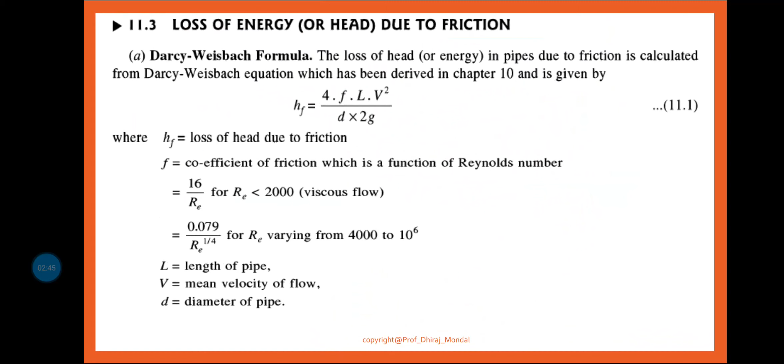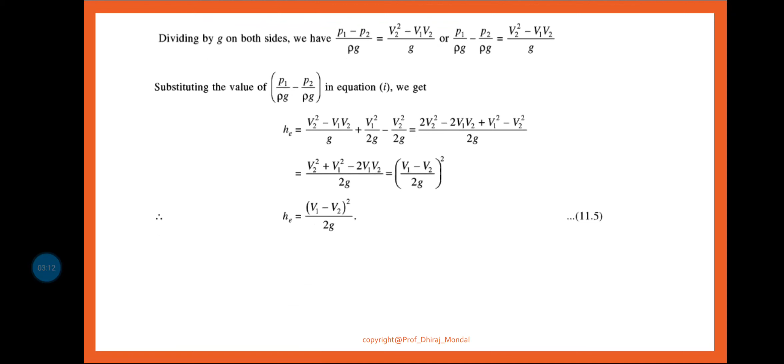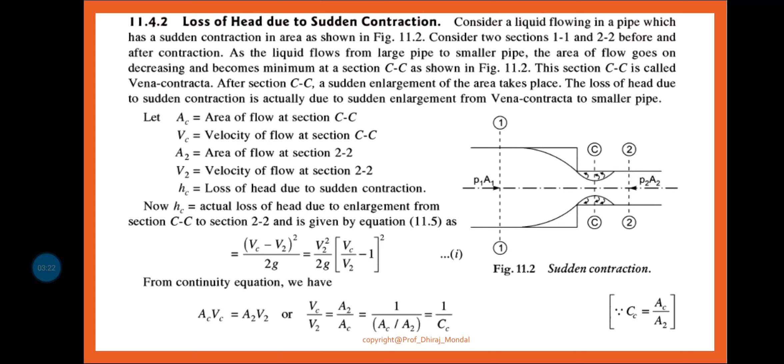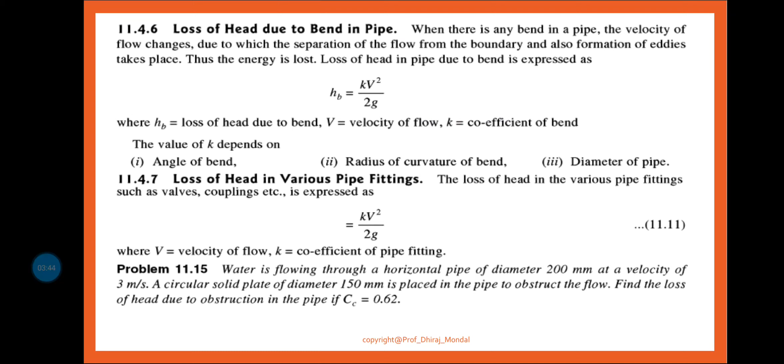So dear students, we were discussing flow through pipe, where we have seen major loss, the Darcy-Weisbach principle, then Chezy's formula, and some numericals were discussed. After that, you have seen the minor energy losses: loss due to sudden enlargement, where we derived H equals V1 minus V2 whole square by 2G, and loss of head due to sudden contraction. This was taken in the previous lecture along with some numericals. There are also other losses: loss due to entrance of the pipe, loss due to exit of the pipe, loss due to obstruction, loss of head due to bend in pipe, loss of head in various pipe fittings, and related numericals were already explained.

Now today we will discuss the hydraulic gradient line and total energy line. So basically, what do you mean by hydraulic gradient line and total energy line? The concept of hydraulic gradient line and total energy line is very useful in the study of flow of fluid through pipe. The hydraulic gradient line is defined as the sum of pressure head and datum head, P by rho g plus Z. This is called the hydraulic gradient line. Why it is needed, we will see afterward.

It is defined as the line which gives the sum of the pressure head and datum head of a flowing fluid in the pipe with respect to some reference line. Or it is the line obtained by joining the top of all vertical ordinates showing the pressure head of a flowing fluid in a pipe from the center. It is briefly written as HGL.

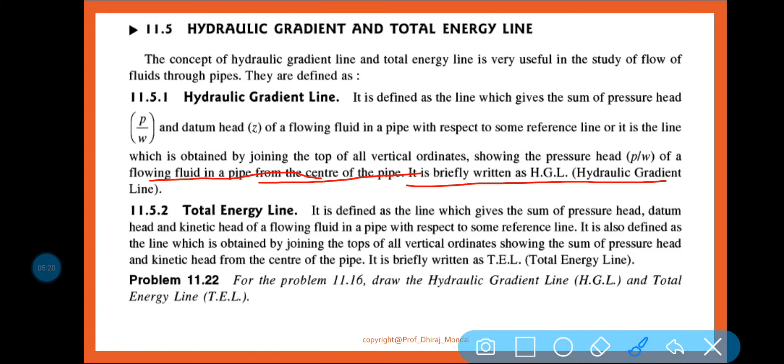Let us consider this is a reservoir. Now when the water is flowing from here to here, A to F, there is some potential head, potential energy. Due to entrance there must be some losses, and due to this traveling distance there must be some losses - major losses and minor losses. Major loss by the Darcy-Weisbach principle: you can find the major loss as 4 f L V square by 2 g D.

But what is the total energy line? It is defined as the line which gives the sum of the pressure head, datum head and kinetic head of the flowing fluid in a pipe with respect to some reference plane. So let us consider this is the reference plane.

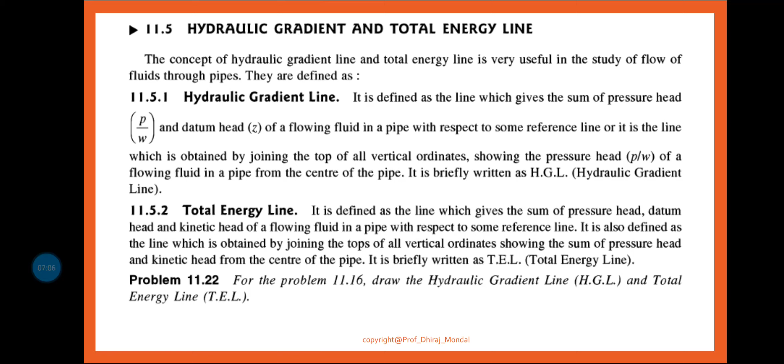It is also defined as the line obtained by joining the tops of all vertical ordinates showing the sum of pressure head and kinetic head from the center of the pipe, and it is briefly written as TEL. Now the question is problem number, this you can see.

So basically we have seen that hydraulic gradient line is equal to pressure head plus datum head. Total energy line is equal to pressure head plus datum head plus kinetic head. So ultimately total energy line is equal to velocity head plus hydraulic gradient line.

Now with the help of this example we will understand how we can draw a hydraulic gradient line and total energy line. It is written for problem 11.16, that means 11.16 number problem was there. This, the hydraulic gradient line and total energy line, you have to solve.

Now in the 11.16 number problem you will see that L, length of the pipe, is given as 50 meter, diameter is given 200 millimeter, so that is your 0.2 meter. Head, this head is given, you can see up to this mark, this head is given 4 meter. F is equal to 0.009.

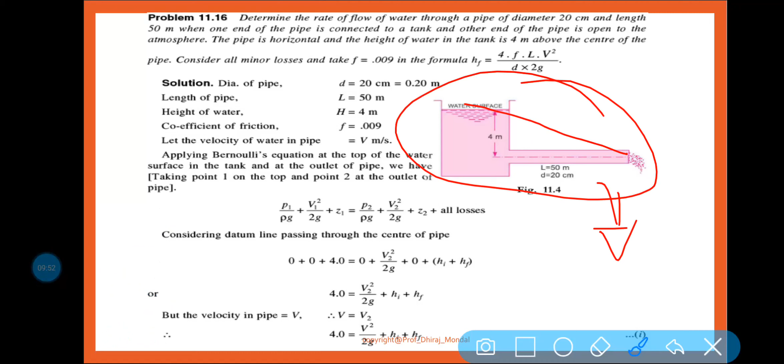So you can see the velocity, this is your velocity, this is the velocity 2.734 meter per second. Can you remember this problem? It was discussed last class, na? So this is the velocity.

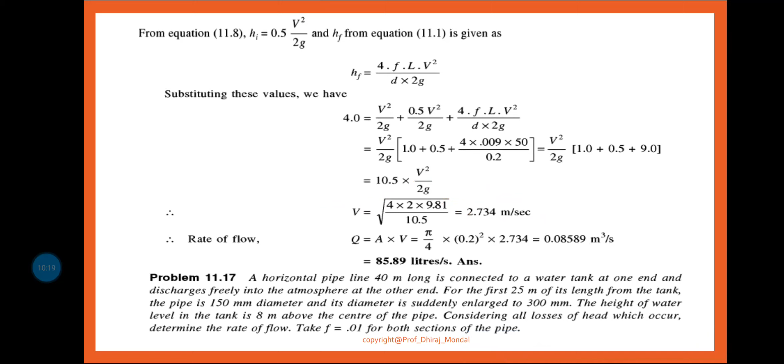Now based on this velocity we need to find out. So hi, what is hi? Hi is equal to, last class we have told you, 0.5 v square by 2g. Now you know the v, so this is the 0.19, the head loss due to entrance.

So basically when the fluid is entering into this pipe, there must be some loss of head due to entrance of the pipe. So initially the energy is your 4 meter energy head, because this is the potential head. Now from the potential head some 0.19 meter energy is lost due to entrance. So that is why it is written here, you can see.

So the point, line AD is basically declined like this, and this is the point E. This is A, this is E. Now due to this length there must be some frictional head loss. So that is your frictional head loss. So let us consider this is the frictional head loss.

Now you need to draw the total energy and hydraulic gradient line. So in the diagram you can see CG is the hydraulic gradient line and DEF is the total energy line. How it is coming? I am coming afterward.

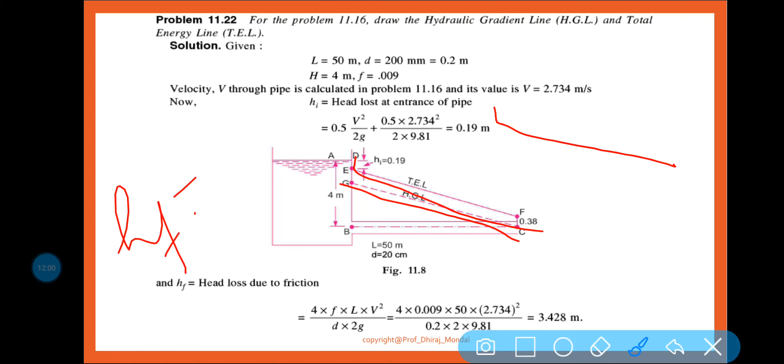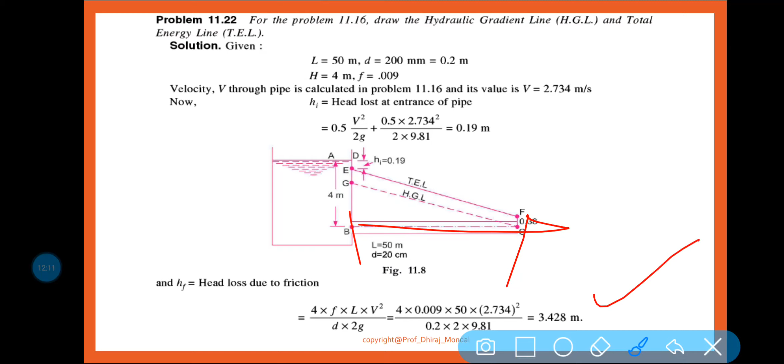So here you can see the HF. How can find out HF? 4FL V square by 2GD, because your major loss is when the fluid is traveling from B to C. So 4FL V square by 2GD, all the values known, HF you can find out.

So what happened? The energy at point A, it is equal to 4, or is equal to D. Now energy due to entrance there is some loss of energy HI, so minus 0.19. So 3.81 is the energy at the point E.

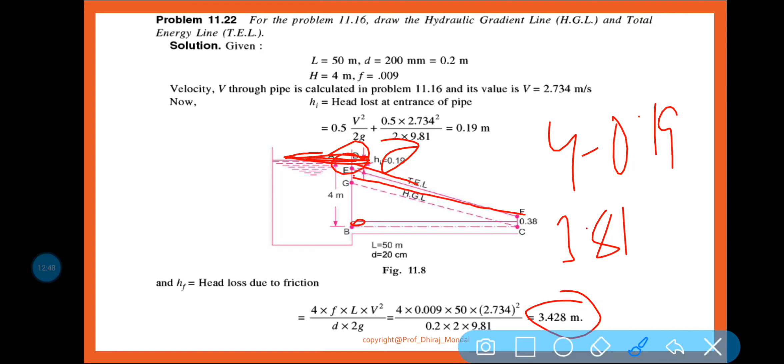Now some loss of head, 3.428 loss of head you can see. So draw a parallel line, just a line here, and how much it will be, you have to travel up to C point.

Now at the C point what is the energy available? That is your velocity head v square by 2g. So at point number A, the pressure head plus kinetic head plus datum head. Pressure head is your 0, kinetic head is your 0, only datum head is available, 4 meter.

So here you can see this point, at this point only datum head is available, that is your 4. Now in the total energy line, energy at B, you can see the total energy at point B is equal to total energy at A.

You can say this is your total energy at A minus HI, that is due to entrance. Due to entrance you know that it is 0.19. So ultimately 3.81 is the total energy at point B. This is point B.

Next, total energy at C. So total energy at C is what? Same process, PC by rho G, V square by 2G plus ZC. So 0, PC by rho G, atmospheric pressure again. 0 is the datum line, because you can see this is the datum line.

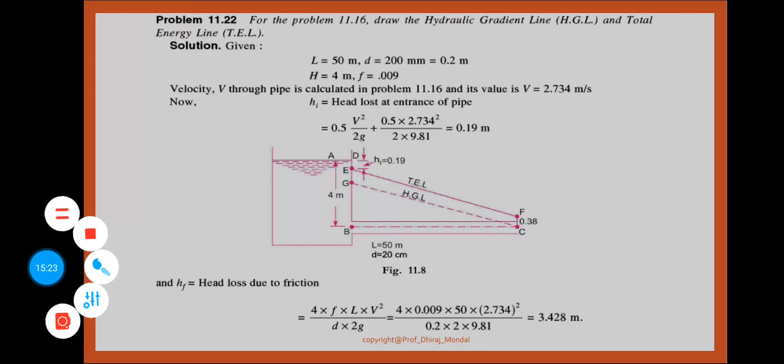Now D and E, connect that D and E. Sorry, F, E and F. Okay, you can join E and F. So initially it was your A, D, then E, then F, and here it is your C, and this is your B. Okay, connect E and F.

You will be seen, this is called your total energy line. DEF is called total energy line. Okay, I hope it is clear.

Now, if you really want to draw the hydraulic gradient line, so it is nothing but the pressure head plus datum head. So only you have to deduct the velocity head, that is your 0.38 from every section, from every point. You can see, so the DEF is the representation of the total energy line.

Now hydraulic gradient line is the pressure head plus datum head, okay, with reference to the datum line. So if you are subtracting this velocity head, you will be getting the total gradient line, hydraulic gradient line.

So you can see from the figure, only 0.38 will be deducted, and you will see at this point there is not any kind of pressure head and datum head, that is why it is 0. So from this point you just draw a parallel line with respect to total energy line. After deducting the velocity head, you will be getting hydraulic gradient line.

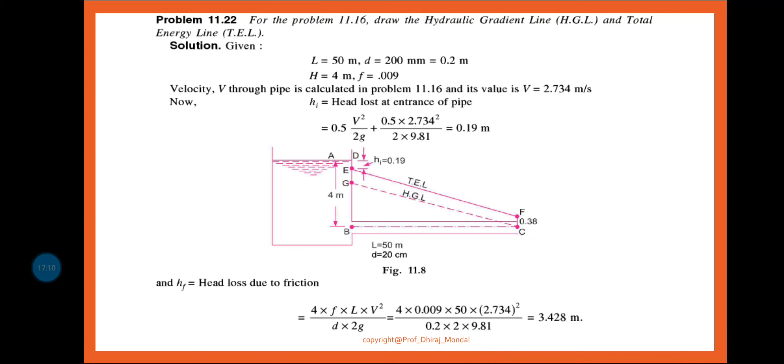Okay, so I hope it is clear how to draw the total energy line and hydraulic gradient line. It is very important for your exam point of view, for GATE, IAS exam also you can consider it. You can consider it a very important problem.

Same process, problem 11.23. For the problem 11.17, draw the hydraulic gradient line and total energy line. So this is your homework.

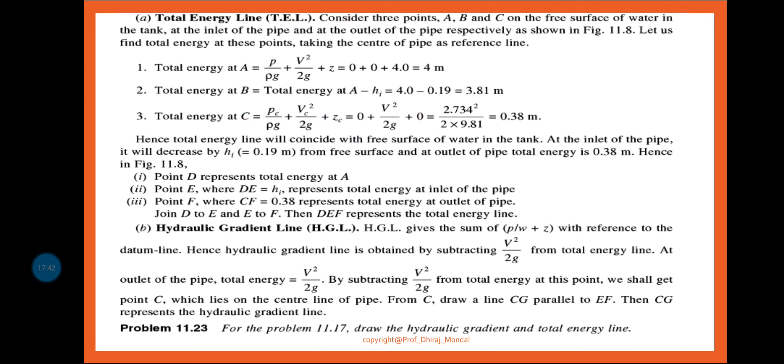Now next is your flow through siphon. So here basically what is siphon? Siphon is a long bent pipe which is used to transfer liquid from a reservoir.

You can see this is your reservoir. From a reservoir at a higher level elevation to another reservoir that is situated at a lower elevation.

Or you can transfer water from one pond to another pond, or one reservoir to another reservoir by the help of a simple pipe connection which should be connected between two reservoirs, and there should not be any kind of air particle, and once the flow is continuous, automatically the water will be displaced from the point at higher elevation to a lower elevation. This is the medium. So this pipe, or siphon, is basically used to transfer or displace the water from higher elevation to lower elevation, provided there is some obstruction between these two reservoirs. So only a pipe, nothing but.

Okay, now you can see here, from this reservoir to this point, this C point is called summit.

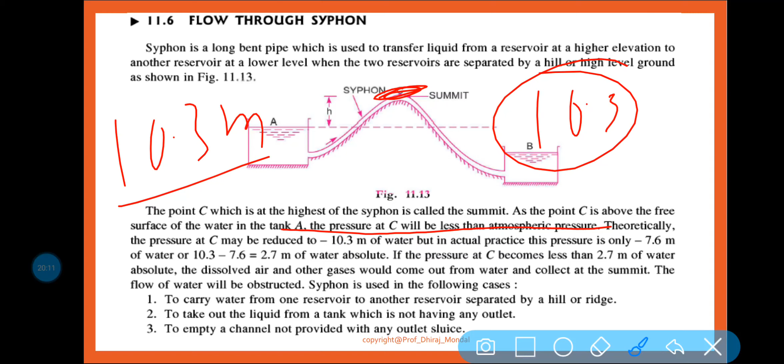Theoretically the pressure at C may be reduced to 10.3 meter of water, which means atmospheric pressure. But in actual practice this pressure is only 7.6 meter of water, or 10.3 minus 7.6, that is 2.7 meter of water absolute. That is why this flow is possible.

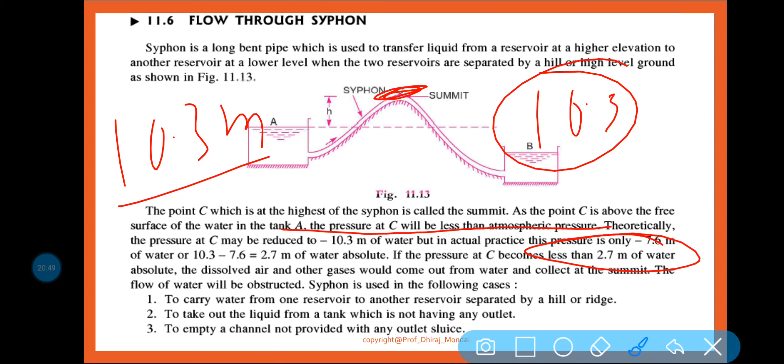Am I right? So if the pressure at C becomes less than 2.7 meter of water absolute, the dissolved air or other gases would come out from the water and collect at the summit. The flow of water will be obstructed.

Basically siphon is used for what function? To carry water from one reservoir to another reservoir separated by a hill or ridge, to take out liquid from a tank which is not having any outlet, to empty a channel not provided with any outlet sluice.

See, in the ration shop you will see kerosene being placed from a barrel to a small reservoir can by the help of a small pipe, that is called a siphon.

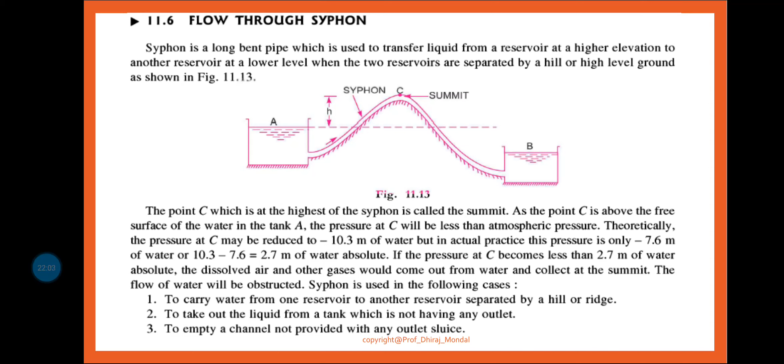Or you will see in a pond, fishermen placing water from one pond to another pond by the help of this siphon. And if you want to empty a channel and there is no kind of outlet sluice, then you can use a siphon. I hope it is clear.

Now let us discuss one numerical related to siphon. The diameter of the siphon is given as 200 mm.

It connects two reservoirs having a difference in elevation of 20 meter. The length of the siphon is 500 meter and the summit is 3 meter above the water level in the upper reservoir. The length of the pipe from the upper reservoir to the summit is 100 meter. Determine the discharge through the siphon and also the pressure at the summit, neglecting minor losses. The coefficient of friction F is given as 0.005.

So here basically diameter is given, and the difference in level of the two reservoirs H is given as 20 meter. In the figure you can see this is the level of water and this is the level of water, so this difference is 20 meter. L, the length of the pipe, is given as length of the siphon 500 meter, and height of the summit from the upper reservoir H is equal to 3 meter.

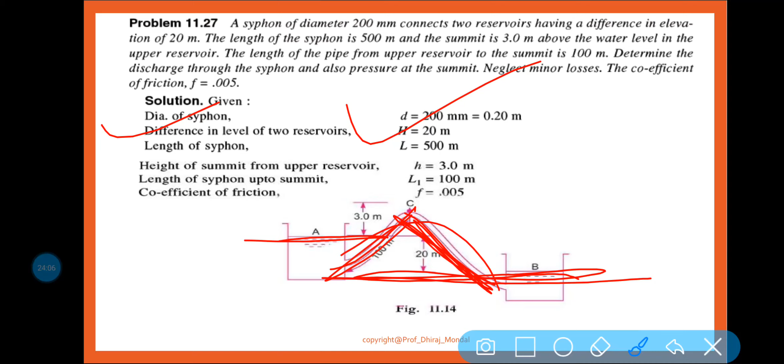Length of siphon up to summit is equal to 100 meter, and the total is 500, so the remaining is 400. The coefficient of friction is also given. You need to find out the discharge.

Now applying Bernoulli's equation at point A and point B, neglecting minor losses: PA by rho g plus VA square by 2g plus ZA is equal to PB by rho g plus VB square by 2g plus ZB plus loss of head due to friction, HF. By the help of the Darcy-Weisbach principle you can find out the friction.

So you can see here the atmospheric pressure is 0, and PA by rho g is the atmospheric pressure, so we are assuming this is 0. VA square by 2g, the velocity head, is also 0. Only the head available is ZA, that is the potential head.

Now the difference between ZA and ZB is given as 20. So ZA is equal to PB by rho g, same process. Here PB by rho g is equal to 0, and VB square by 2g is equal to 0 because the water is placed in another reservoir which is static in nature.

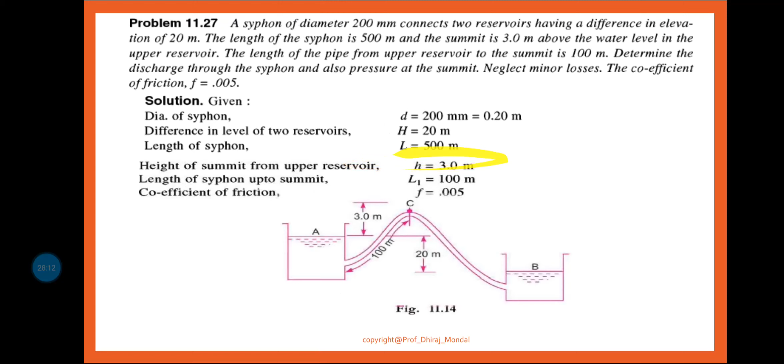We are taking datum line passing through A. Now PC by rho g, there must be some pressure head at point C, and VC square by 2g, that is V square by 2g, plus 3. Why it is 3? Because the height of the summit is given as 3 meter.

So here you can see the height is equal to 3 meter. That is why it's PC by rho g plus V square by 2g plus 3 plus HF1, which is your frictional head loss up to this point in the 100 meter pipe. So 0, all these are 0.

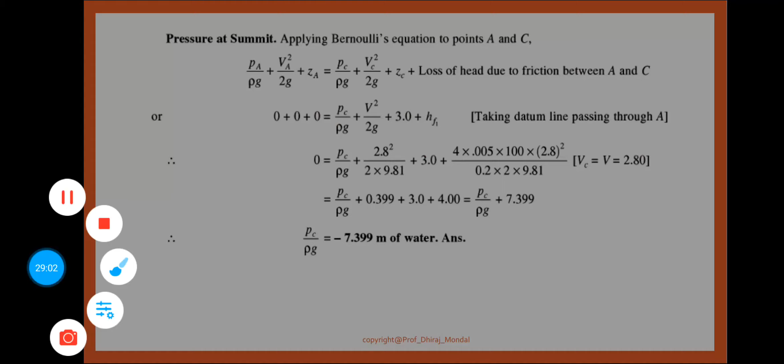0 is equal to PC by rho g plus V square by 2g, that is 2.8 square by 2 into 9.81, plus ZC which is equal to 3, and HF is equal to 4FLV square by 2GD, same formula. So all the values are known, only the unknown value is PC by rho g, that is the pressure head at section C, or at the summit, minus...

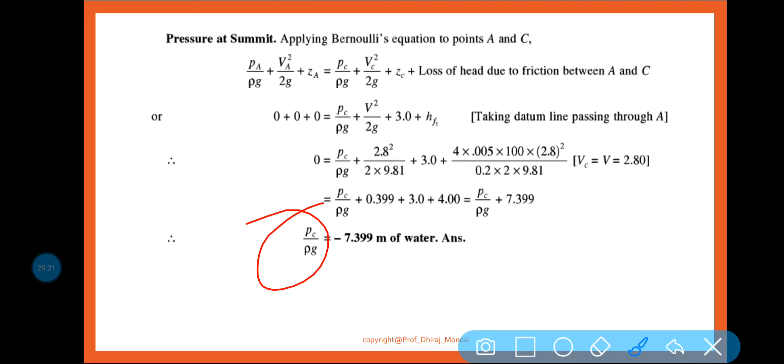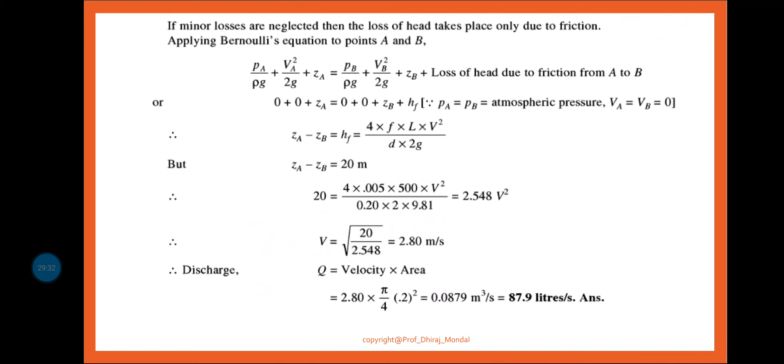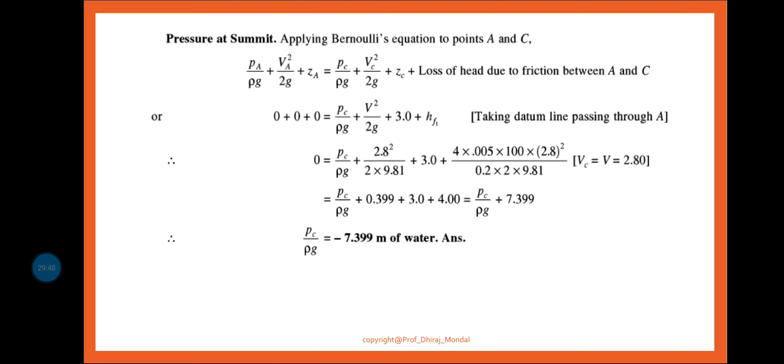7.399 meter of water, so this is one kind of vacuum pressure. That is why we can say the pressure at point C is basically less than the atmospheric pressure. By this calculation, we can easily say PC by rho g is equal to minus 7.399 meter of water, and it is equal to some vacuum pressure. It is also proved that the pressure available at the summit is less than the atmospheric pressure. I hope it is clear.

Next class we will be discussing flow through pipes in series, or flow through compound pipes. That will be discussed in the next class. I hope it is clear.